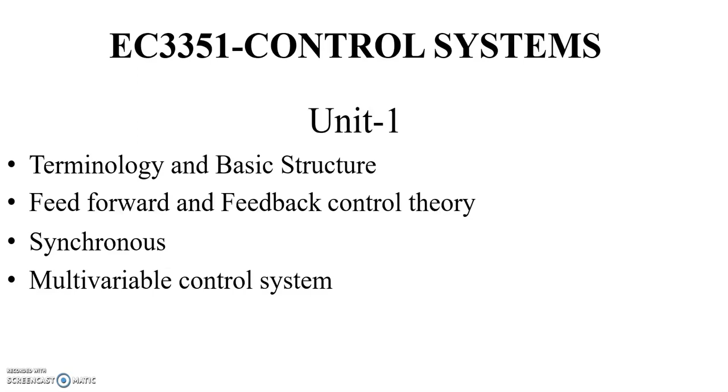In this video lecture, let us discuss the topic terminologies and basic structure, feed forward and feedback control theory, synchronous and multi-variable control systems under unit 1 of control systems. The objective of this video lecture is to understand the basic terminology of control system concepts.

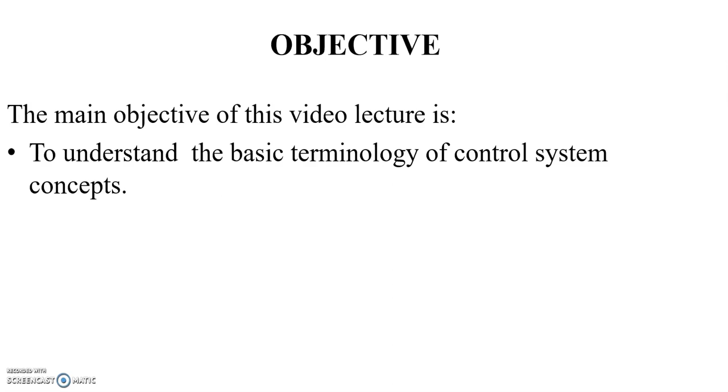First, what is a control system? Before that, what is a system? A system is an arrangement of different physical components connected or related in such a manner so as to form an entire unit to attain certain objectives. So, what is a control system? It is an interconnection of components forming a system configuration to provide a desired response. So this is a control system. I am giving the input. What is the desired output?

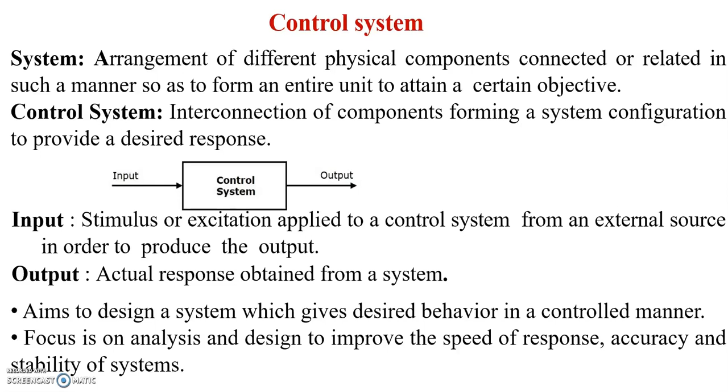So next, what does input mean? It is a stimulus or excitation applied to a control system from an external source in order to produce the output. So next, what does output mean? It is the actual response obtained from the system. The aim is to design a system which gives a desired behavior in a controlled manner. The focus is analysis and design to improve the speed of response, accuracy and stability of the system.

So next, what are the applications of control systems? Some of the applications are: flight control systems in modern commercial and military aircraft, unmanned aerial vehicles, robotics in remote environments, for example space, sea, non-invasive surgery, etc. Next one is chemical process control. It regulates the flow rate, temperature and concentration, etc.

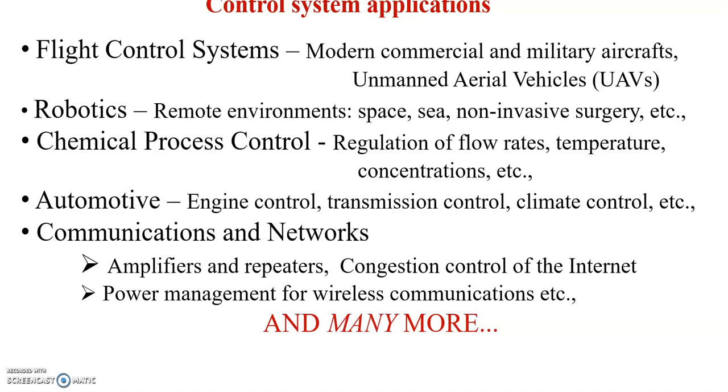Next one is automotive. There the systems are engine control, transmission control, climate control. These are some of the examples. And then in communications and networks, the amplifiers and repeaters. There is congestion control of the internet. Next one is power management for wireless communication, etc. And many more applications are there.

Next is the comparison between a system and a control system. This is a system. In a system you provide the input, and the output may or may not be desired. In a control system you give the input but get the desired output. For example, take a fan. A fan without a blade cannot be a system, because it cannot provide any output.

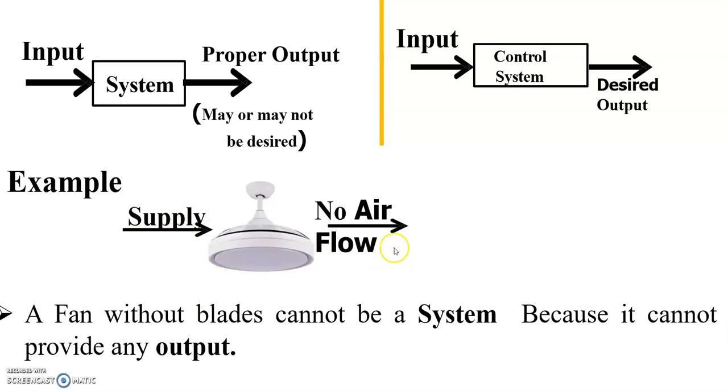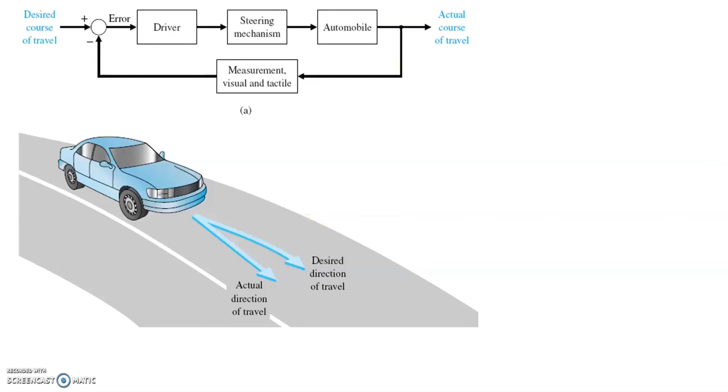Next one is a closed loop system in an automobile. I am taking this example here. This is the desired course of travel, and this is the driver. Here is the steering mechanism. This one is the automobile. Here is the actual course of travel, and then the feedback through measurements, visual and tactile. First, the driver operates the steering mechanism. So the driver is the controller here.

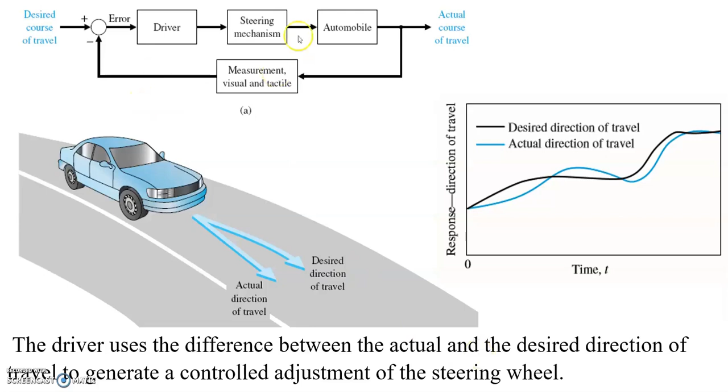Depending upon the measurement that the sensor makes, an error will be produced. Depending upon the error, the driver will take action. The black color is the desired direction of travel. The blue color is the actual direction of travel. So the driver uses the difference between the actual and the desired direction of travel to generate a controlled adjustment of the steering wheel.

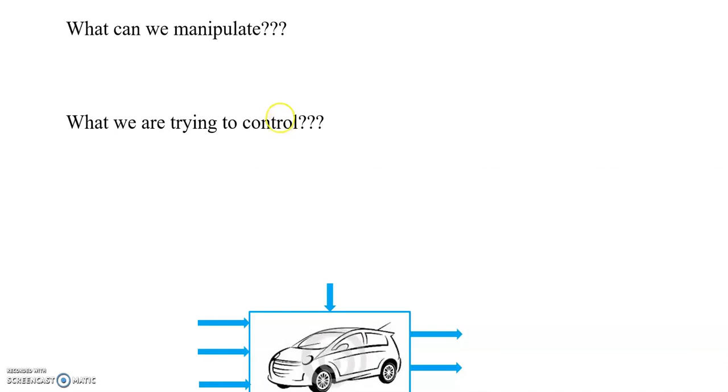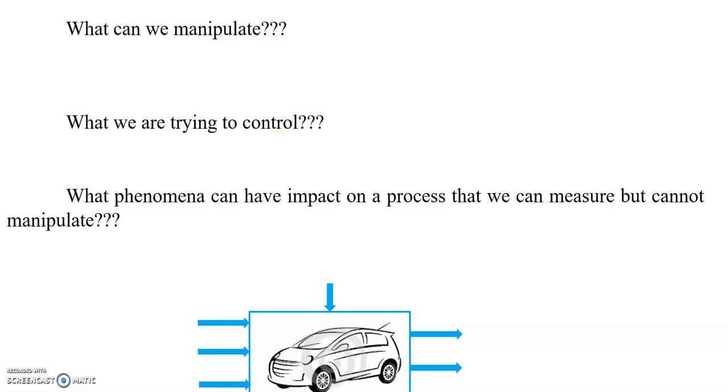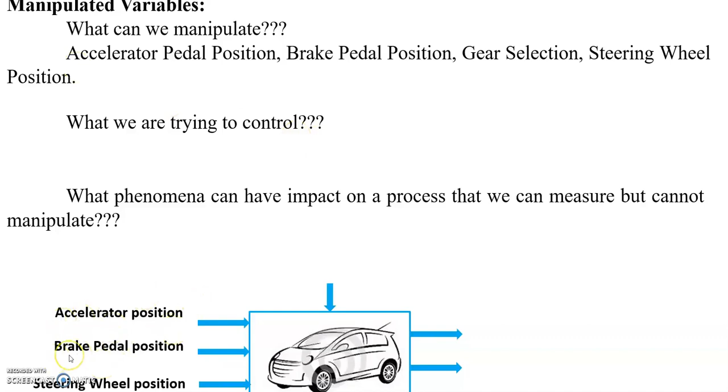Next: what can we manipulate, what are we trying to control, and what phenomena have an impact on a process that we can measure but cannot manipulate? First, what we can manipulate is called a manipulated variable. Here the accelerator pedal position, brake pedal position, gear selection, and steering wheel position are the manipulated variables for the automobile system.

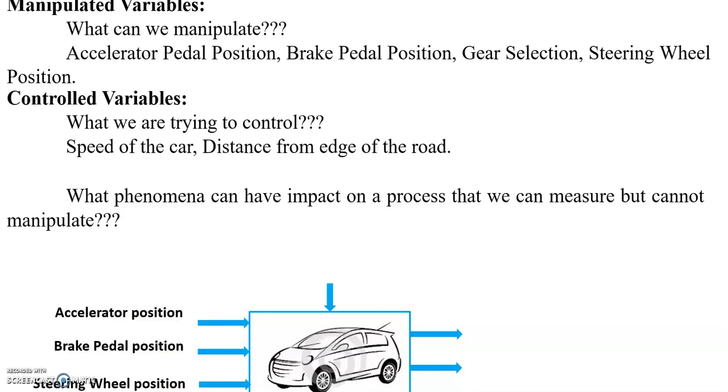Next, what is a controlled variable? What we are trying to control is called the controlled variable. The speed of the car, distance from the edge of the road. These are the controlled variables. Next, feed forward variable. Phenomena that impact a process which we can measure but cannot manipulate are called feed forward variables. Various road conditions such as road inclination, amount of water on the road, type of material the road is made of, amount of traffic, potholes on the road, etc.

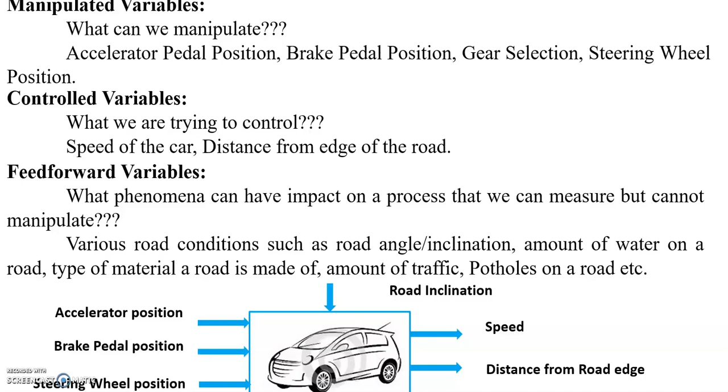Next, the classification of control systems. Control systems may be classified in a number of ways. Some popular classifications depend on the methods of analysis and design: linear control systems and non-linear control systems. What is a linear control system? It obeys the superposition theorem. The principle of superposition includes two important properties: one is homogeneity and another is additivity.

What is homogeneity? A system is said to be homogeneous if, when we multiply the input by some constant, the output is also multiplied by the same constant. Next, what is additivity? Suppose we have a system S, we give input A to the system the first time, and we get output B corresponding to input A.

So on the second time we are giving input A and corresponding to this we are getting the output as B. So now suppose this time we are giving the input as A, summation of our previous inputs, that is A plus A, and corresponding to this input, suppose we are getting the output as B plus B. So we can say that the system S is following the properties of additivity.

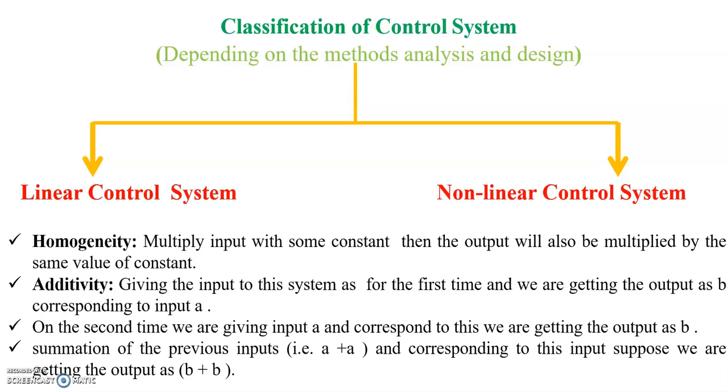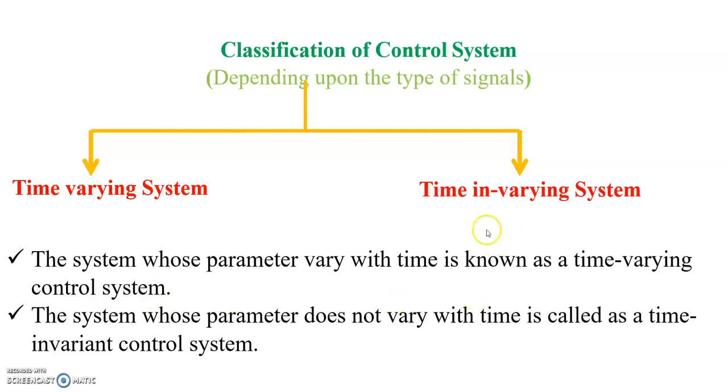So next one is another classification of control system. It depends upon the types of signal. So time varying system and time invariant system. The time varying system is where the parameters vary with time, whereas the time invariant system means it does not vary with time.

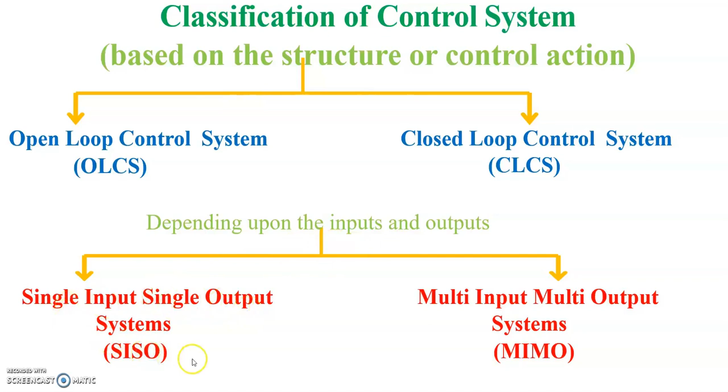So next, another classification for a control system is based on the structure or control action: open loop control system and closed loop control system. Next one depends upon the inputs and outputs. If it is single input single output, that is a SISO system, whereas multi input multi output is a MIMO system.

So next, what is the open loop control system? First here I am giving the input, the process will be there, and this is the output. So this is called an open loop control system. Or the desired output response goes to the actuating device and then the process, and then this is your output. Okay, so these are the block diagrams of open loop control system.

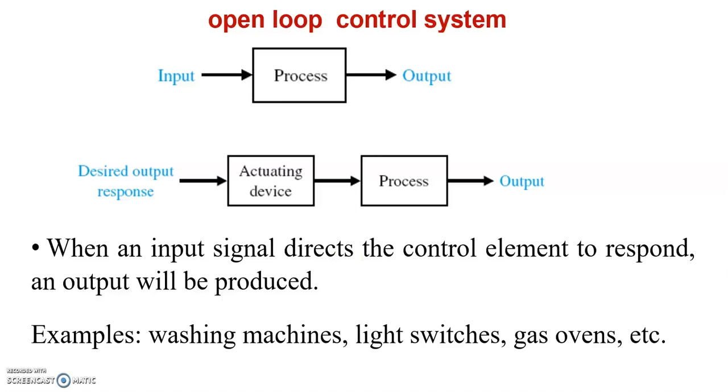When the input signal directs the control element to respond, output will be produced. Example: washing machine, light switches, gas oven, etc. So next are some practical examples in your day-to-day life. First one is an electrical hand dryer. Hot air comes out as long as you keep your hand under the machine, irrespective of how much the hand is dried.

Next one is an automatic washing machine. It runs according to the preset time, irrespective of whether washing is complete or not. Next one is the bread toaster. It runs as per adjusted time, irrespective of whether toasting is completed or not. Next one is the automatic tea or coffee maker. It functions for pre-adjusted time only.

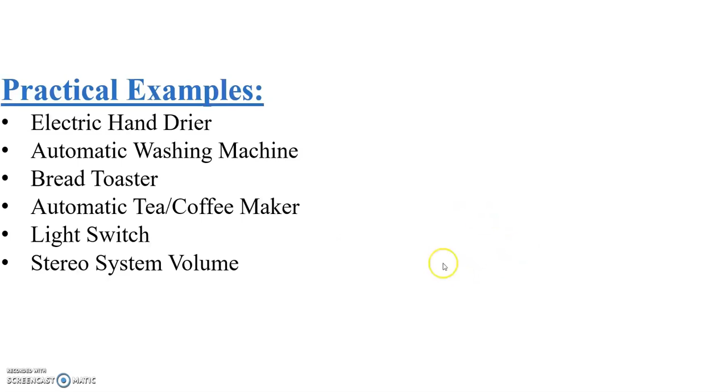Next one, the light switch. The lamps glow whenever the light switch is on, irrespective of whether light is required or not. The final one is stereo system volume. The volume is adjusted manually irrespective of output volume level. So these are some of the practical examples in your day-to-day life.

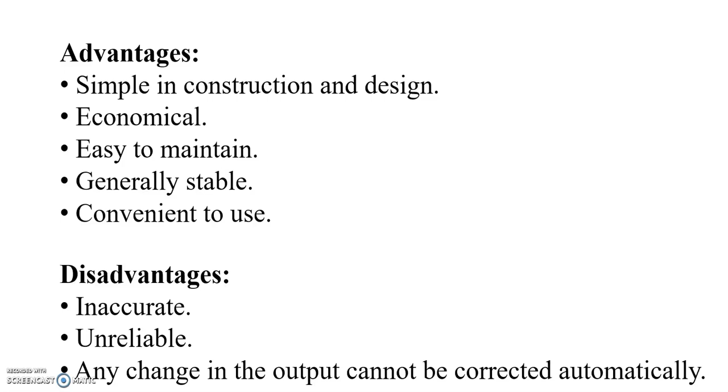So next, advantages of open loop system: simple in construction and design, economical, easy to maintain, generally stable, convenient to use. Some of the disadvantages of open loop systems are: inaccurate, unreliable, and any changes in the output cannot be corrected automatically.

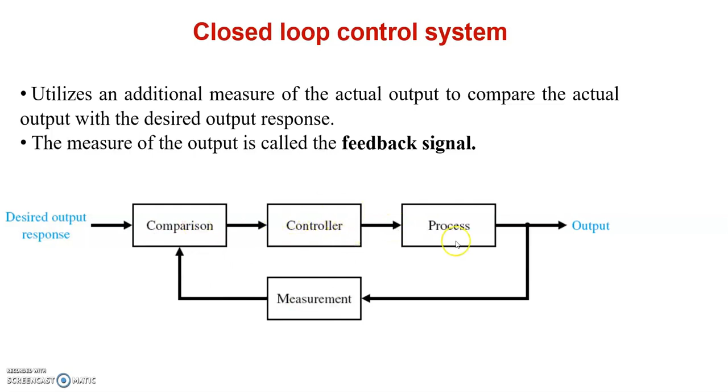So next one is a closed loop control system. It utilizes an additional measure of the actual output to compare the actual output with the desired output response. The measure of the output is called the feedback signal. So here this is measured, and this is the feedback signal. I compare this feedback signal with the desired output, and then this output is given to the controller, so the controller will take action. This action is sent to the process. So this is a closed loop control system.

Some of the practical examples of closed loop control systems are: automatic electric iron, where the heating element is controlled by the output temperature of the iron. Next one is the servo voltage stabilizer, where the voltage controller operates depending upon the output voltage. Next one is a water level controller, where input water is controlled by the water level of the reservoir.

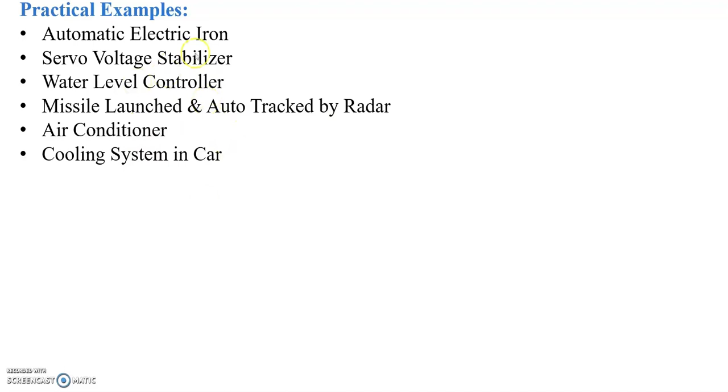Next one is a missile launched and auto tracked by radar. The direction of the missile is controlled by comparing the target and position of the missile. Next one is the air conditioner. Its function depends upon the temperature of the room. The last one is the cooling system in a car. It operates depending upon the temperature which is controlled. So these are some practical examples of closed loop systems.

So next one is the advantages. It is more accurate: high accuracy, as any error that arises is corrected due to presence of feedback signal, large bandwidth, facilitates automation. Sensitivity of the system may be made small to make the system more stable, so less affected by noise.

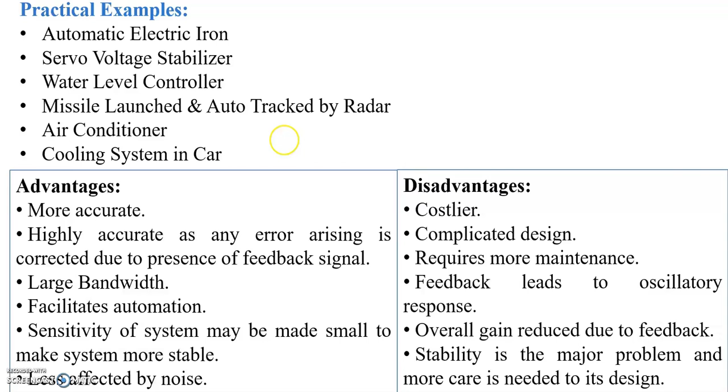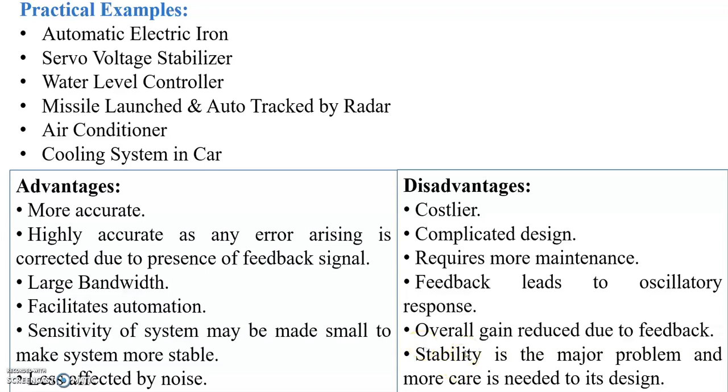Some of the disadvantages of closed loop systems are: it is costlier, it has complicated design, it requires more maintenance, feedback leads to oscillatory response, and overall gain reduces due to feedback. Finally, stability is the major problem and more care is needed in its design. So next, comparison between open loop and closed loop system.

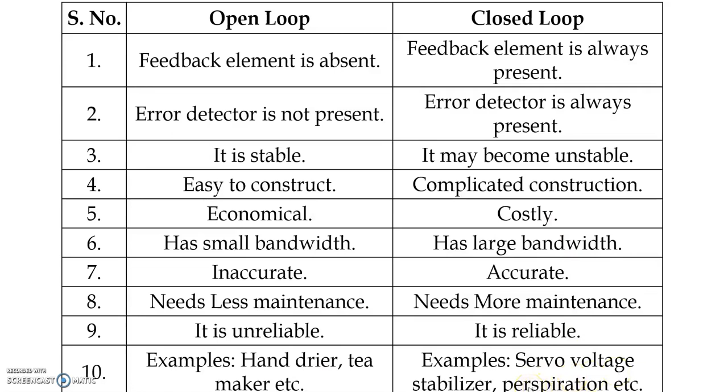Examples of open loop systems are hand dryer, tea maker, etc. These are some of the examples. Whereas for the closed loop system, examples are servo voltage stabilizer, perspiration, etc. So next one is: what is a feed forward and a feedback control system?

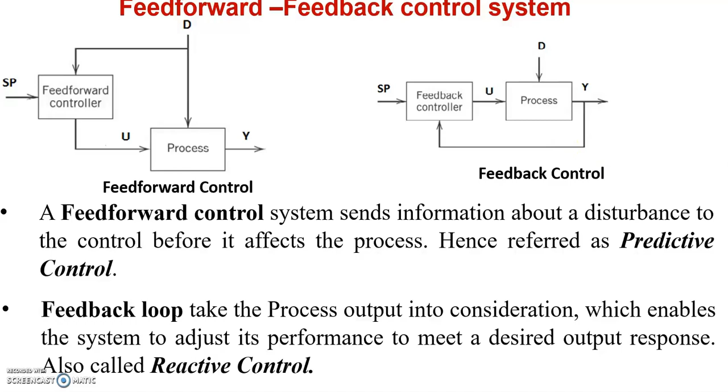The feed forward control system sends information about a disturbance to the controller before it affects the process, hence it is referred to as predictive control. Whereas the feedback control system takes the process output into consideration, which enables the system to adjust its performance to meet a desired output response. It is also called reactive control. So next, the comparison between the feed forward and feedback control system.

In the feed forward control system, corrective action is taken before the disturbance affects the output, whereas in the feedback control system, corrective action is taken after the disturbance affects the output. In feed forward control, the variables are adjusted based on prior knowledge and prediction, whereas in the feedback control system, the variables are adjusted depending upon the error.

The feed forward control system takes corrective action before the disturbance enters into the process, whereas the feedback control system takes corrective action only after the disturbance has affected the process and generated an output. Feed forward control does not affect the stability of the system. A stable system without feed forward control will remain stable even after including one. Whereas the feedback control system may create instability of the system.

The feed forward control system predicts the output as it does not measure the output, also called predictive control, whereas feedback control reacts only to the process error, that is, the deviation between the measured output value and the set point. So it is called reactive control.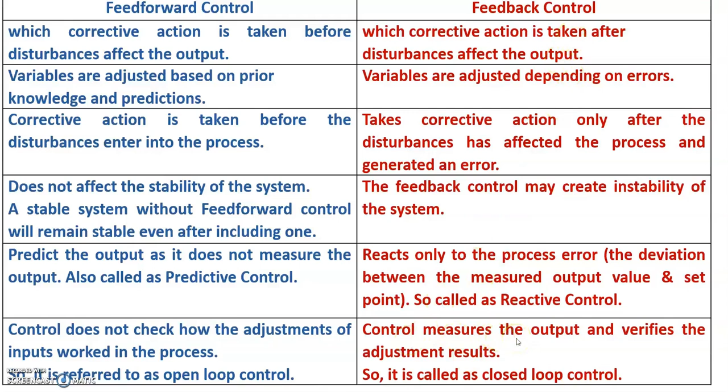In feed forward control, the controller does not check how the adjustment of input worked in the process, so it is referred to as open loop control. Whereas in feedback control, the controller measures the output and verifies the adjustment results, so it is called a closed loop system. So next one is servo mechanism.

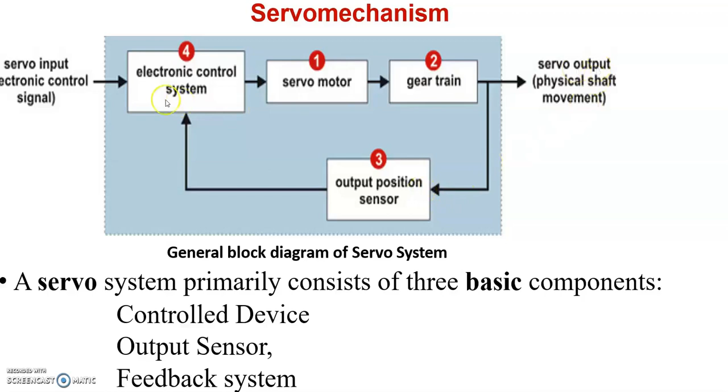This is a servo mechanism block diagram for the control system. The servo mechanism is primarily consisting of three basic components: a controlled device, output sensor and feedback system. So this is a controlled device. Next, the four major components of servo mechanisms are motor, gear linkage, position sensor and motor control electronics. These are the major components of a disassembled servo.

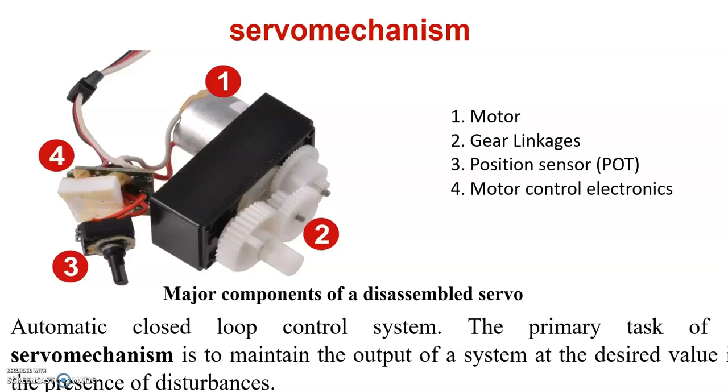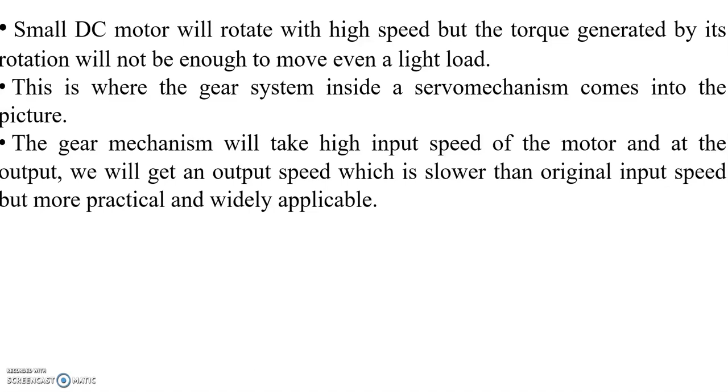As an automatic closed loop control system, the primary task of a servo mechanism is to maintain the output of the system at the desired value in the presence of disturbance. A small DC motor will rotate with high speed, but the torque generated by its rotation will not be enough to move even a light load. This is where the gear system inside a servo mechanism comes into the picture. The gear mechanism will take the high input speed of the motor, and at the output we will get a speed which is slower than the original input speed, but more practical and widely applicable.

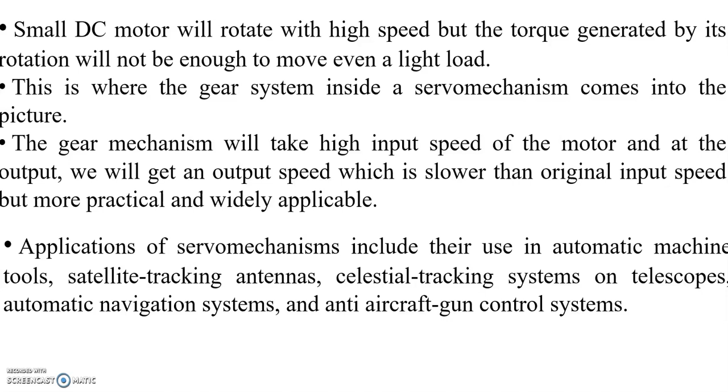The applications of servo mechanism include their use in automatic machine tools, satellite tracking antennas, celestial tracking systems on telescopes, automatic navigation systems and anti-aircraft gun control systems. So next one is a multi-variable control system.

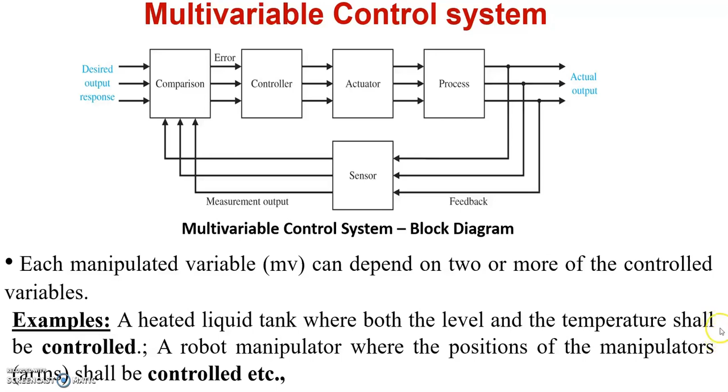Examples: a heated liquid tank where both the level and the temperature shall be controlled. A robot manipulator where the position of the manipulators, that means arms, shall be controlled.